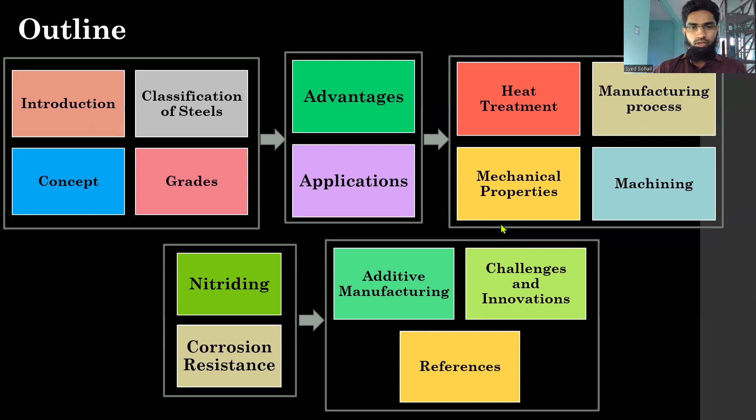So, starting with the introduction, the first unique difference that you see is that this is high strength. Other steels we know of, plain carbon steel, low, medium, and high carbon steel, do not have that strength. So, relatively, this is a high strength steel. That's the first unique thing. And this is a special steel. It gains its high strength from the precipitation of intermetallic compounds and has distinctively superior toughness. Not only does it have high strength, it does so while ensuring toughness as well, which makes it special.

It is essentially carbon-free, almost about 0.03% carbon. So the carbon added is an extremely low amount, and that's why it is said to be essentially carbon-free. We'll see a comparison of the carbon percentages added in the different grades of steels in the steel family in the next slide. But essentially, we can say this is carbon-free, an almost negligible amount of carbon.

High amounts of alloying elements. This is one unique factor: because of the absence of carbon, we are adding more alloying elements. We'll see why these alloying elements are added, although they are costly. Nickel of about 18%, a significant share, cobalt 8 to 12%, and molybdenum 5%. So a high amount of alloying elements in this particular material.

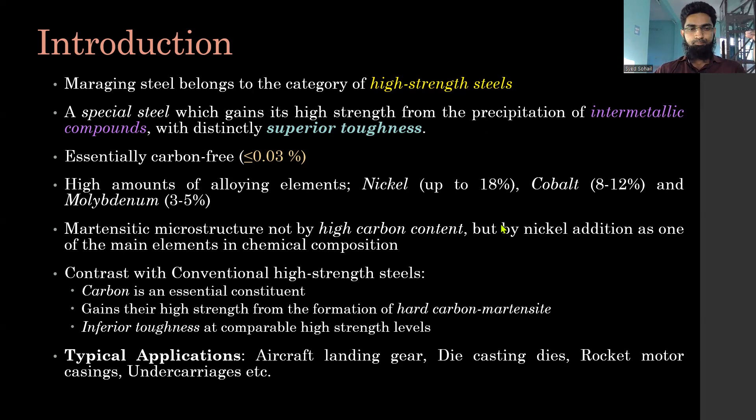And then, steels. So we're seeing where this steel sits in the steel family. We know from the basics, steel is an alloy of iron and carbon. Iron is the base, and you have carbon added as an alloying element. There are other alloying elements, as you can see: manganese, silicon, nickel, chromium, molybdenum, vanadium, titanium, cobalt, niobium, and aluminum. These are there, but the principal alloying element is carbon. That's how the steel family started, the ability to alloy carbon with iron, so that we have a lot of applications.

It serves many applications. For example, the first classification, carbon steel. From industry statistics, over about 90% of total steel production is devoted to carbon steels, meaning carbon steels have a share of over 90% of global steel production. So as I mentioned, low carbon steel, which we generally call mild steel, and then medium carbon steel and high carbon steel. These are the three carbon steels, which account for over about 90%. So these are all over the place.

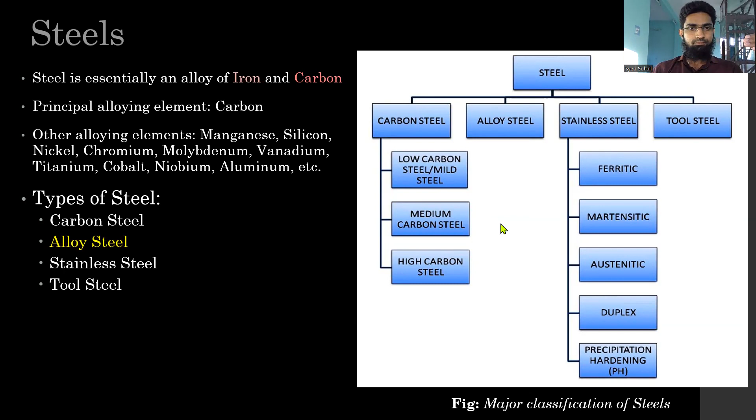So comparing it with other conditions, what other steels do we have that compare with the strength of maraging? H11 steel, D6AC steel, AISI 4340, 410 stainless steel, AM355 stainless steel. They have comparable strengths, but they don't compete well in toughness and other properties. As I mentioned here, limitations with conventional high strength steels. The first thing to note is poor toughness, which I highlight. They have poor toughness and a high temperature austenitizing step, drastic quench.

These steels require a quench process. Once they are formed, the process of bringing it to room temperature requires a quench. So that is another distinguishing point. Whereas with maraging steel, we don't require the drastic quench. We can do air cooling. Air cooling is preferable and has been proved satisfactory to achieve the strength and all those other requirements from the application perspective.

Workability issues. These steels, although they offer high strength, are not workable in the sense of cold working or hot working or even welding, and even some other forming operations. So we club it together as workability, which is an issue with these steels. They work harden. That's the drawback. You have welding issues because of the high amount of carbon added, more cracking and issues thereof. Corrosion issues as well. So these are the problems with these steels. High strength steel, yes, but some limitations. Well, many. So we'll see.

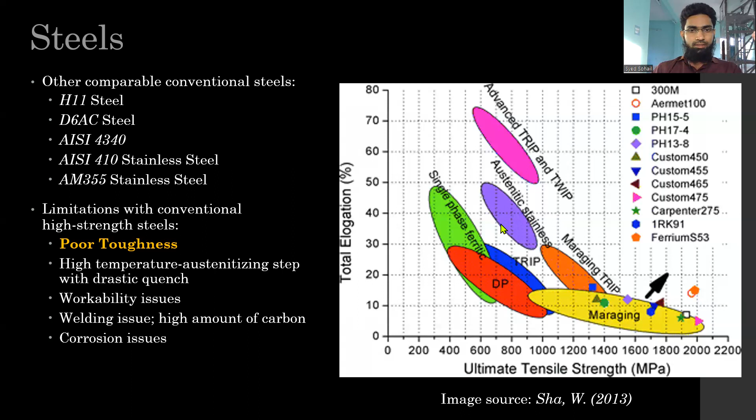Coming to the concept, the development of this material started in about the late 1950s at Inco Research Laboratory. This is a laboratory which was the pioneer getting the material to the market or to the industrial landscape. What they saw, the industrial benefit, the impact that it had in the industry, was that we were able to achieve high strengths, extraordinarily high strengths, from a tough martensite. We're able to have such high strength and toughness.

And this was very readily heat treatable. A simple heat treatment cycle was another advantage that it presented as a unique factor to the industry. So you have an outstandingly tough martensite, strengthened rapidly to extraordinarily high levels. The strength achieved is rapid, doesn't take more or complicated heat treatment cycles. And this is a concise and objective way of looking at how it achieves the strength.

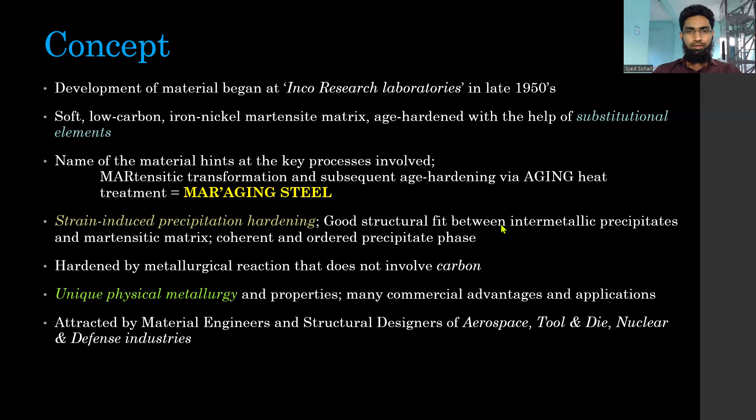Coming to the different grades this material has been offered in. The data is taken from an INCO document. There are several sources, but majorly I have taken information from the INCO research document, who are the pioneers of the development of this material. And another document from NASA on the metallurgy and applications of this material, a very comprehensive document on the technical aspects, the processing history, and the heat treatment.

From that material, special steel manufacturers offer the steel in two modes, wrought and cast: four wrought commercial grades and one cast grade. It is generally supplied in the annealed and scale condition, because it is very tough in that state. It is soft as well, hardness about 30 to 35 HRC. So it is soft and tough, and correspondingly readily machined and formed. This is the general state suppliers supply the material in. You can see that there are different grades here.

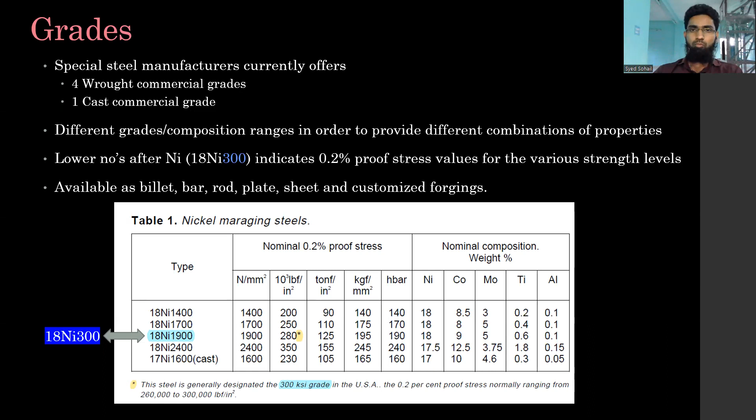Coming to the advantages that this steel has to offer, from the mechanical properties perspective, it offers high strength, we discussed. A high strength to weight ratio as well. This is another significant feature for industries such as aerospace. They are fuel efficient, and fuel efficiency demands high strength to weight components. And maraging steel offers that, and that's how it has been able to serve those industries quite well. Notch strength is also high, and this is important for impact applications. Those which have to endure impact load have to have high notch strength.

In terms of high strength, it doesn't just have high tensile strength. It has high compressive strength, high yield strength, ultimate tensile strength, fatigue strength also. So it is high in all these aspects. And high compressive strength is desirable for the tool and die industry. Just as a side point, it maintains high strength up to at least 350 degrees Celsius, which I mentioned, property retention. Properties have to be retained at moderately high temperatures. So that retention is another advantage of this material. High impact toughness and plane strain fracture toughness, where toughness properties come into play, which I explained are needed in certain industries.

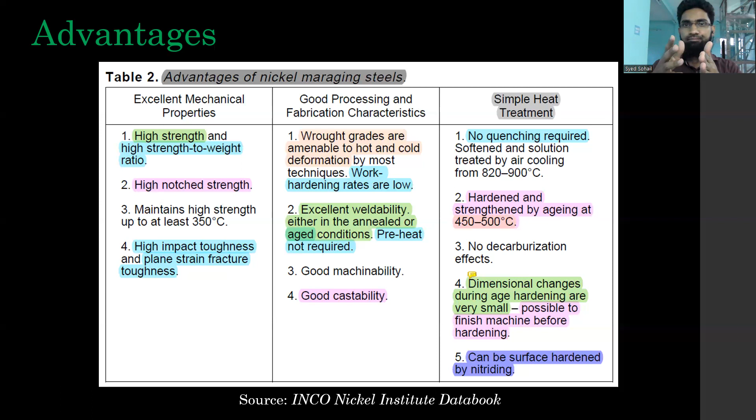Because once it is aged, generally after heat treatment, many materials will distort. There is a change of dimensions, either shrinkage or expansion, whatever the mode may be. But there is some change of dimensions. So that is not an issue with this material because it is predictable and it is not much cost. So you can finish machining before aging peak.

And there are research papers where machining is done after aging for tight tolerances, for tight application requisites from these particular industries. You can have those post processing in terms of post machining being done. But for applications which have some tolerance range to bear, this is a useful feature that can be utilized. So the dimensional change is a significant aspect that has been exploited in aging heat treatment mode.

They can be surface hardened by nitriding. We'll see a slide of nitriding. So the surface hardening through nitriding is done to improve the wear, fatigue, and corrosion properties, etc. So they can be surface hardened. They are amenable. They are nitriding friendly.

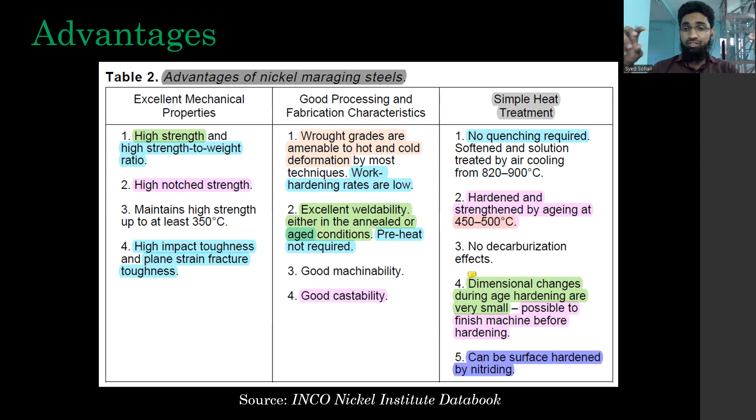Speaking of the dimensional change, there is a case study of this plastic compression transfer mold wherein for 480 degrees centigrade for 4 hours, this was the aging heat treatment schedule, and the shrinkage was 0.02 mm per mm. So you can see very less shrinkage. And the amazing thing was this was the only material that could offer such shrinkage.

So in some cases, this turns out to be the only material that can offer such properties or characteristics. So unique characteristics and sometimes the only available material to resort to. In other cases, you have certain other high strength steels that you can take, which are cost competitive. But then you have to manage the absence of toughness with those high strength but low toughness steels.

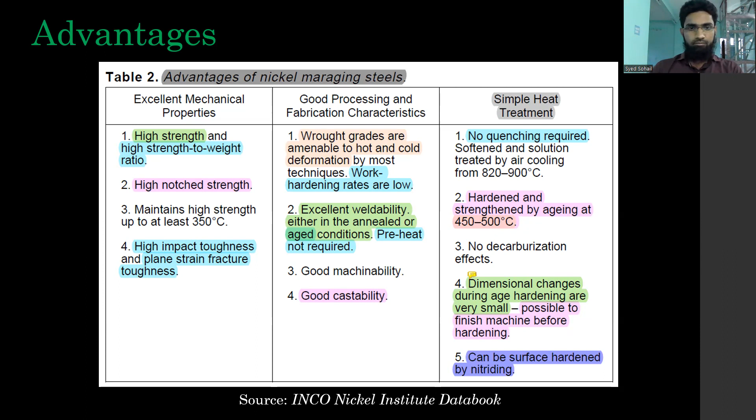Coming to the applications, we can see a lot of applications in various industries. You have aerospace industry, as mentioned, rocket motor casings, landing gear, jet engine shafts, also a very critical component. And even helicopter flexible drive shafts are made with it. In hydrospace, basically marine,

you have pressure hull recovery devices, military bridges, especially portable military bridges, made with this material because of the strength and toughness required; the ability to carry it from one place to another requires them to have this high strength to weight ratio. Cannon recoil springs also, because of the impact loads they take. The toughness and strength come as requirements.

Production tools. This is from the tool and die industry: molds, die casting dies for aluminum and zinc, gears and machine tools. The excellent mechanical properties these steels offer have led to longer die lives. For example, in one case study, up to about 25 times more die life than other comparable die steel.

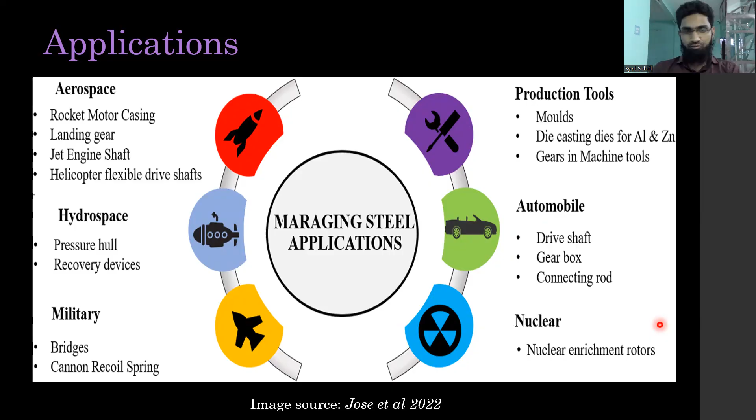From the heat treatment perspective, as mentioned, it has a simple heat treatment cycle. Solution treatment is performed at 820 generally for complete recrystallization of the hot work structure. So basically, hot work is done, as I mentioned. This has an influence on the microstructure.

So now you have to bring back this distorted, work hardened microstructure to fully austenitic, which is soft, and therefore ready for further hot working, cold working, any other form of working that you want to do in the production schedule of the component. So this fully austenitic structure is achieved after solution heating. So that is done.

While this material is formed from the manufacturing perspective, you have this material taken from FCC austenite to BCC martensite. That is what is happening. Face-centered cubic austenite to body-centered cubic martensite. So that is when it is being fabricated in the first go.

But once it is cast, then you have some hot working to be done based on the application requirement, basically the geometrical requirement, that you have to bring it to some geometry. You have some processes to be done. Those processes require in-process annealing, which we mentioned.